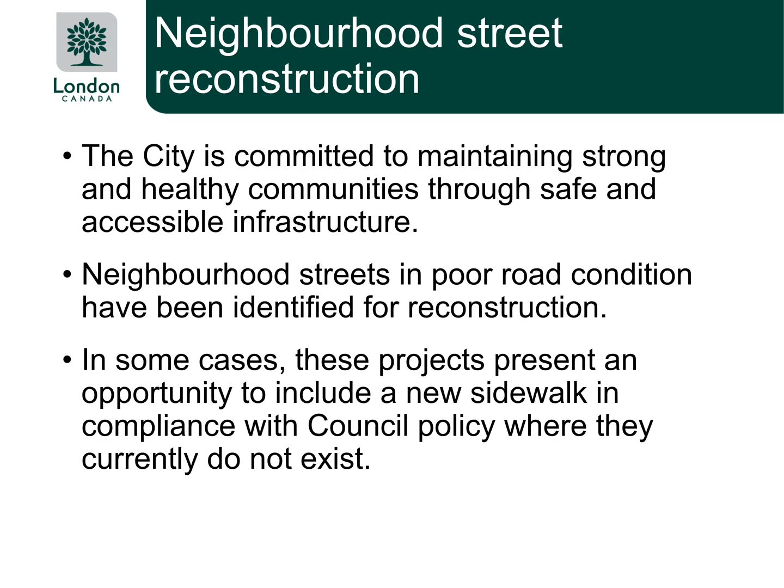First, we'd like to share a little bit about neighborhood street reconstruction happening across London. The city is committed to maintaining strong and healthy communities through safe and accessible infrastructure. As roads deteriorate over time, they can begin to crack and show distress. The city identifies neighborhood streets in poor road condition and reconstructs them in the spring and summer. In some cases, these projects present an opportunity to include building a new sidewalk in compliance with council policy on one or both sides of the street where they currently do not exist. Each project is different in its own design, timeline, and infrastructure that needs to be replaced. We hope this presentation can introduce you to the work that is being planned and help answer some of the questions you may have.

The project limits are Abbey Rise from Longbow Road to Scarlett Avenue, and Scarlett Avenue from Abbey Rise up to Wychwood Park.

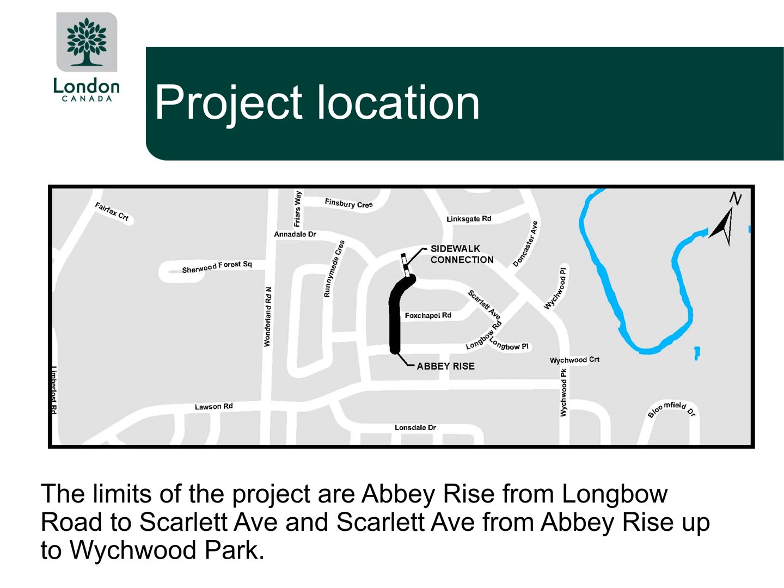Some of the works to be completed include the removal and replacement of existing curb and gutters, new granular road base to meet modern standards. The roadway will receive new asphalt, base and surface layer this year. The removal and installation of existing catch basins with additional catch basins installed to improve drainage.

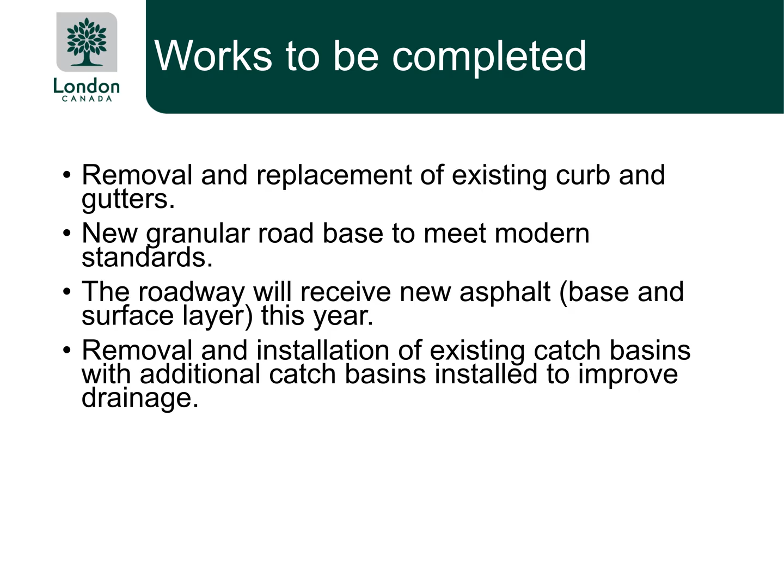Here you will see a typical draft engineering design drawing showing the limits of construction, each individual house and their property lines. Trees have been identified using these symbols. The new sidewalk is shown on the west side of Abbey Rise in pink.

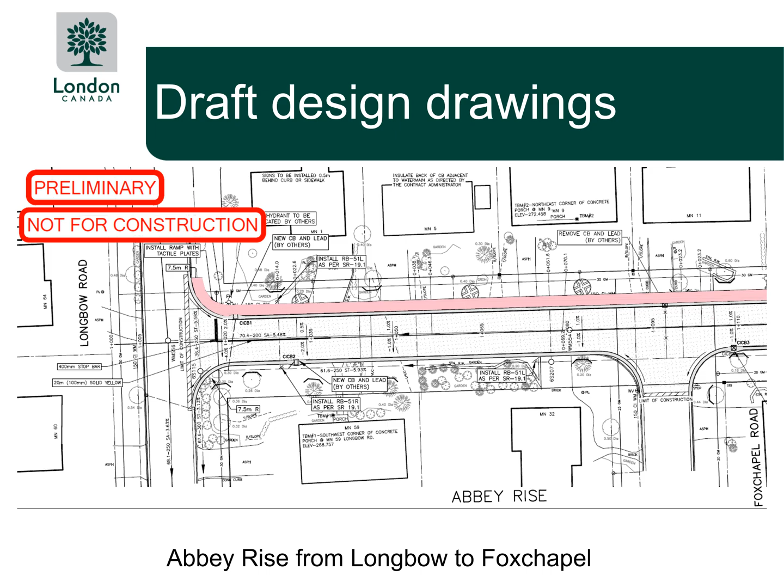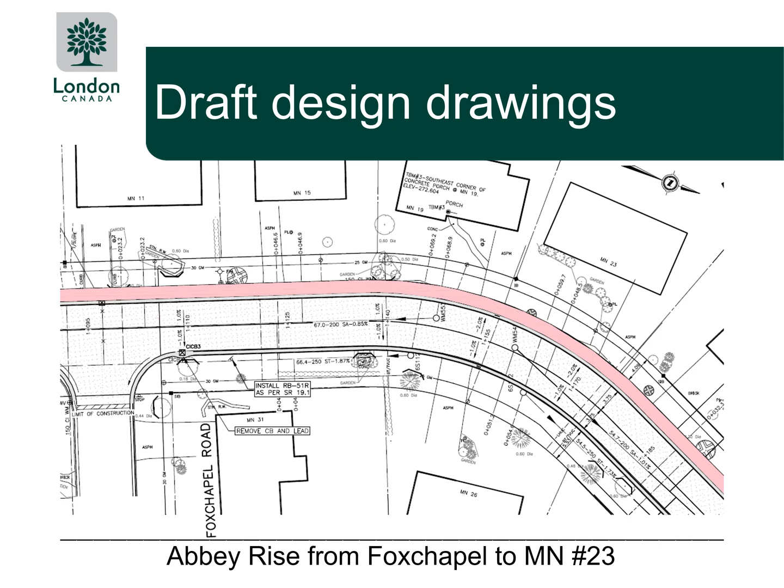This drawing shows homes from Longbow Road to Foxchapel Road. Please pause the video to take a longer look at the drawing at any point. This drawing shows homes from Foxchapel Road to Municipal Number 23. This drawing shows homes from Municipal Number 23 to Scarlett Avenue.

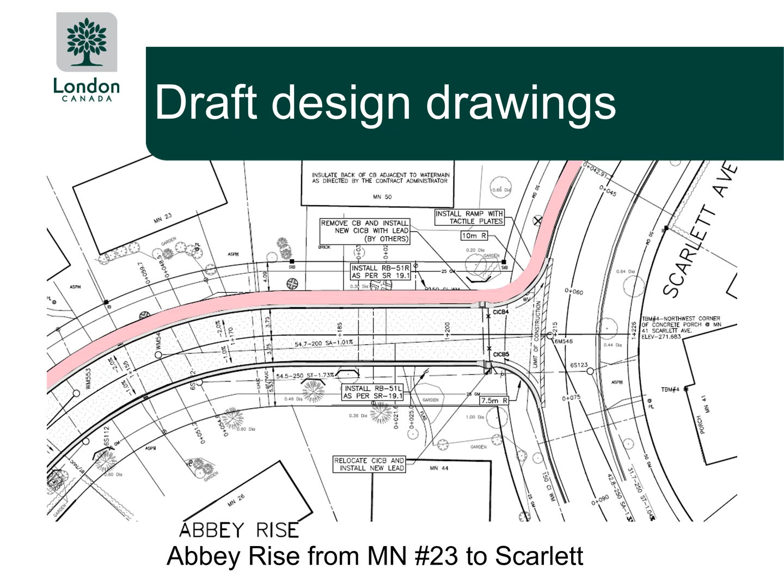In this drawing, you will see a proposed 1.8 meter sidewalk directly adjacent to the existing curb along Scarlett Avenue. The sidewalk is to provide a safe, accessible connection from the proposed sidewalk on Abbey Rise to Wychwood Park.

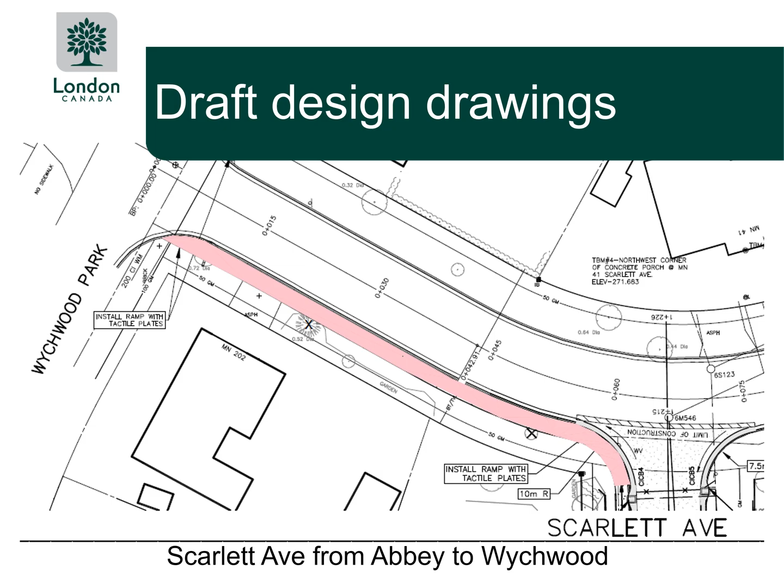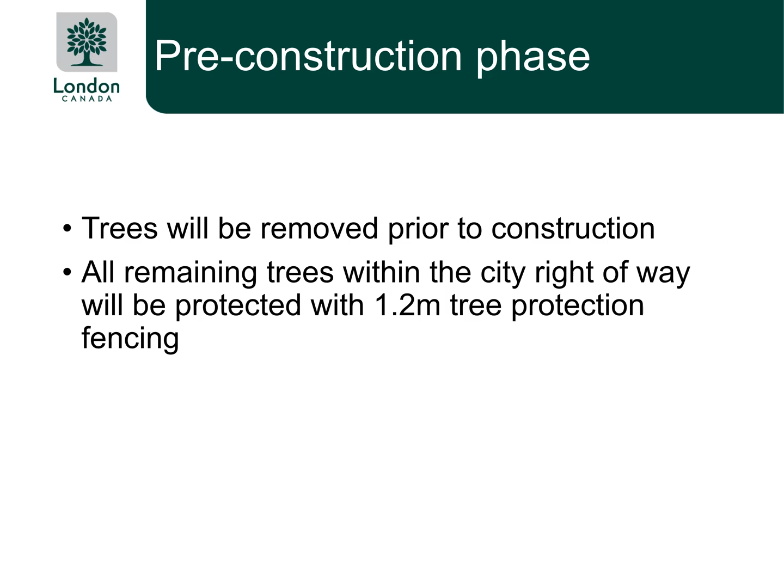The construction phase will include the removal of curb, gutters, and asphalt, the removal and replacement of catch basins, including installation of new catch basins, and the placement of new curbs and gutters, asphalt, and sidewalk.

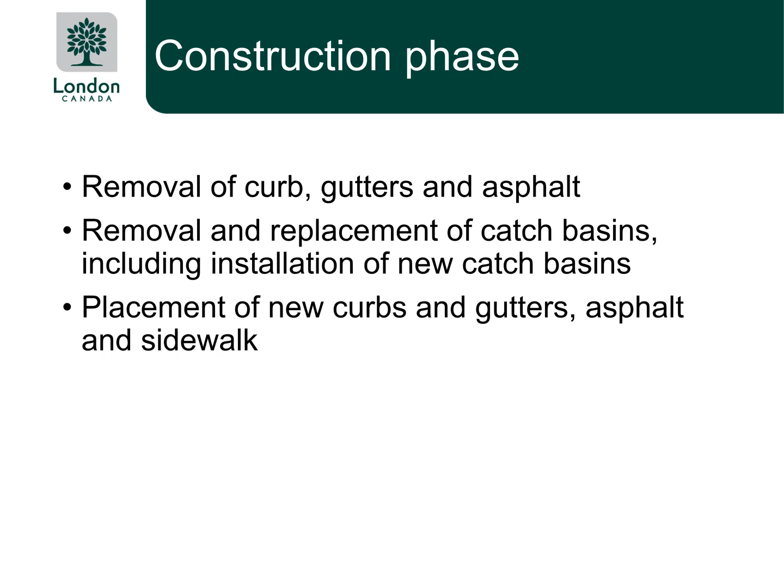A 1.8 meter wide sidewalk adjacent to the curb is proposed on the west side of Abbey Rise. A connection to Wychwood Park will be provided via a new 1.8 meter wide sidewalk adjacent to the curb on the west side of Scarlett Avenue.

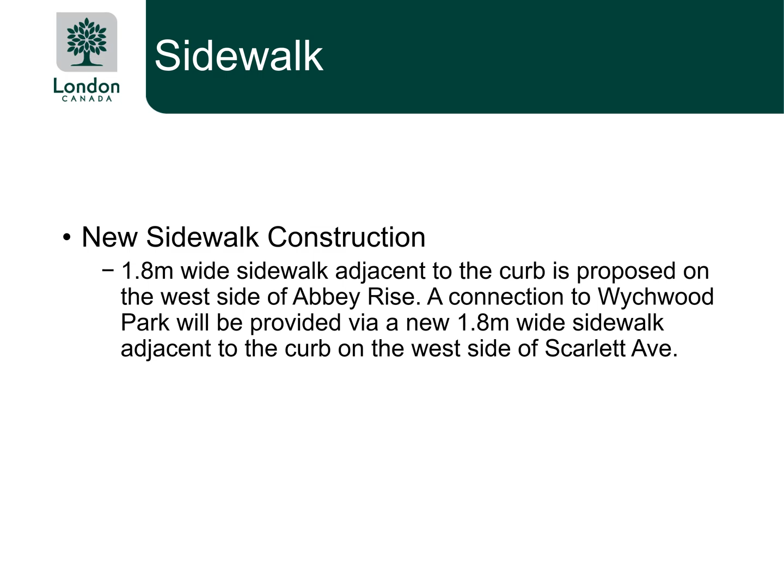During the design process, an assessment is completed by the city's forestry division. This assessment includes an evaluation of tree health, size and species, including the recommendations for tree pruning, tree protection during construction, and identification of tree removal.

Tree removals are identified where the tree health is identified as poor and removal is coordinated with the project, or where conflict with the installation of new infrastructure is unavoidable. Tree removals are a joint decision between the city's forestry division and the engineering project team.

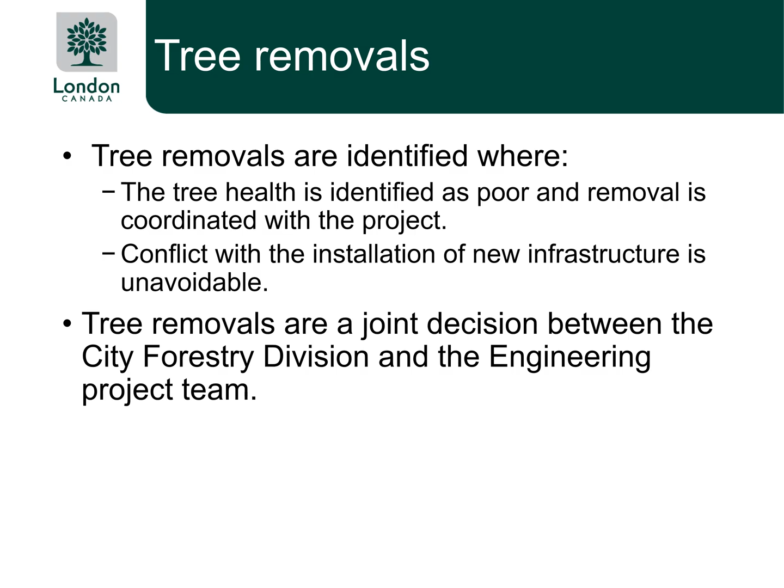The city has a consolidated yearly contract for the planting of trees across multiple projects. This contract is separate from the neighborhood reconstruction project. The city forestry division will assess and plan tree planting where applicable. Homeowners will receive more information from the city prior to replanting.

Access to driveways will be maintained except for times when work on driveways and curbs are completed. Cars can park on adjacent streets when this work is being completed. Parking enforcement will be notified that construction will be ongoing and parking on adjacent streets will be allowed overnight. Please be mindful of all prohibited parking areas.